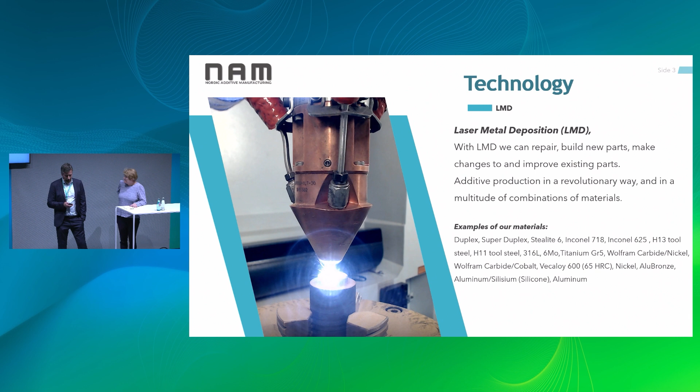We are using Siemens NX for both CAD and CAM, which gives us the possibility to produce advanced geometry. We have had a tight collaboration with the Norwegian supplier of the software to be able to do this.

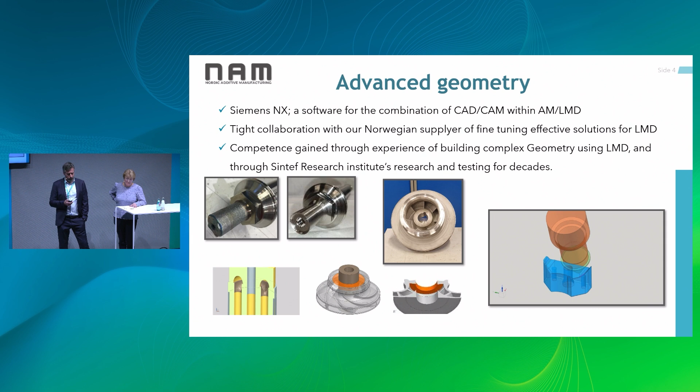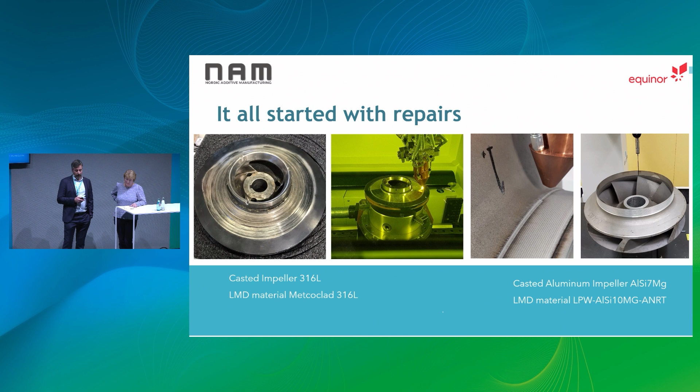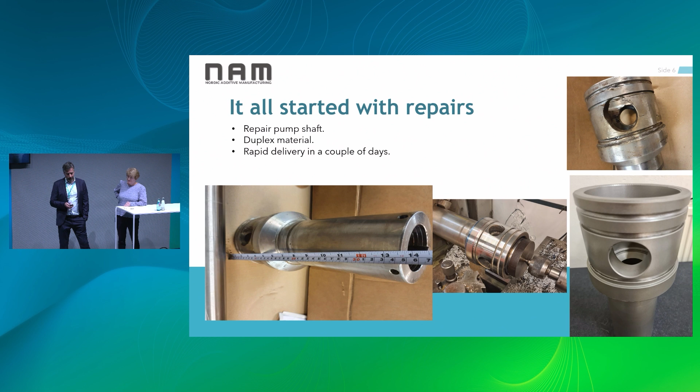But it all started with repairs, for us it started with repairs. You see some impellers here for Equinor, both in 316 steel and also in aluminium, and some examples with shafts for pumps where we have done repair. This is in duplex material, 22 chrome. And also repairs like this in aluminium bronze for this old steam dumper, a steamboat going on our local lake.

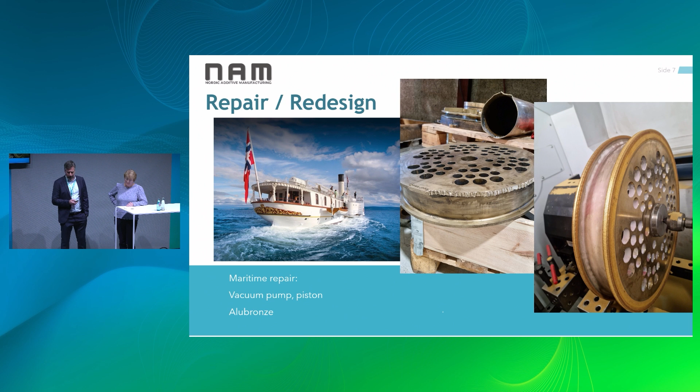And now Mette will talk us through a couple of projects. Together with NAM, we made two quite good components, I think, and we also tried to follow the guidelines from DNV.

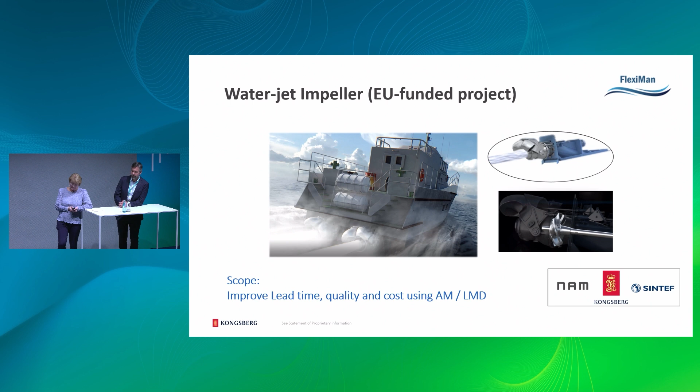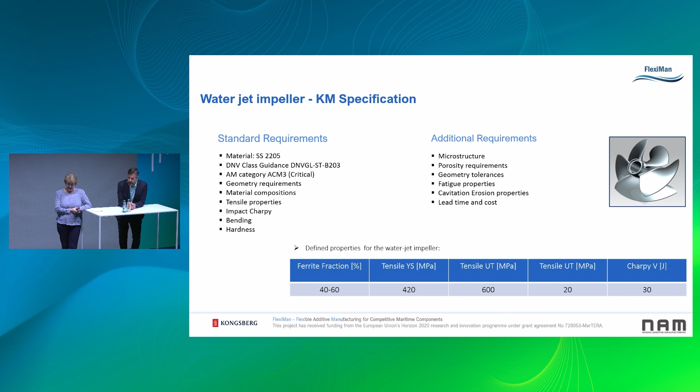We had an EU project, we call it Fleximan, and we chose to make a water jet impeller in duplex material with this LMD method. The scope was to improve lead time, improve quality, and reduce cost. There are standard requirements for this material, but in addition we also had Kongsberg Maritime requirements regarding microstructure, porosity, fatigue which is important for a water jet impeller, cavitation erosion, and also lead time and cost.

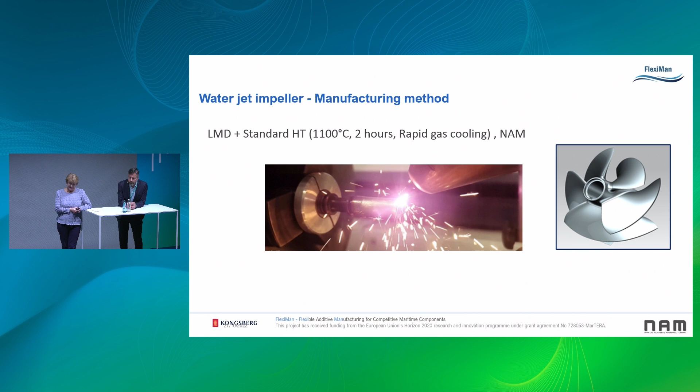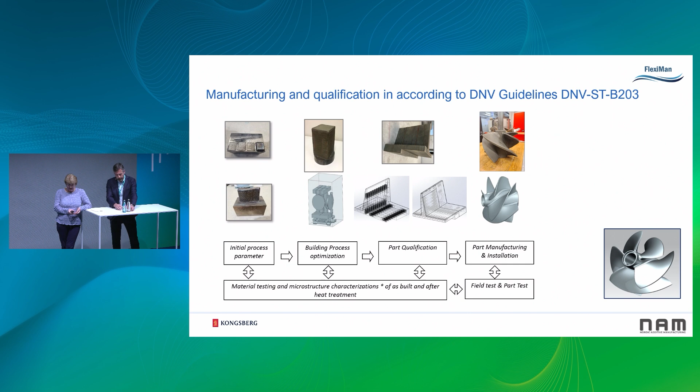So this impeller was produced by NAM and also heat treated. We followed the guidelines from DNV. This is a critical part, so we had to use the AMC3 rules. We had to make this block, and in addition a representative part as in the critical part of the impeller blades. We did a lot of testing, and the results were very good. All properties were better than the requirements for this part, in all directions.

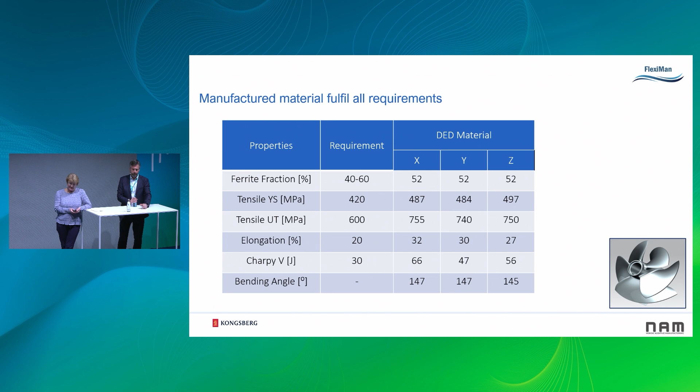One very good piece of news was the cavitation erosion testing. Because this impeller is highly loaded and a very high speed propeller, we have some problems with erosion in this cast duplex material. When we compared cast duplex with bronze and also this printed material, it seems like the LMD material has better erosion properties than the cast one, which is very good for our impellers. Also for fatigue testing, our stresses are below the fatigue limit, so even at high cycles the properties are as good as cast.

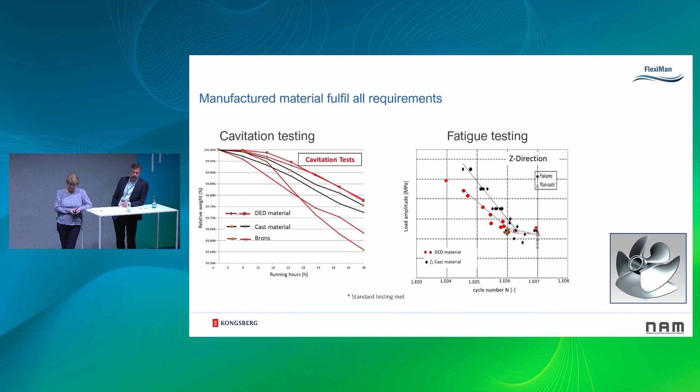So here you see the result of the printed impeller, the machined impeller, and also the geometry of this impeller was very good. In production in Finland, they said maybe they should have given tighter tolerances, because they were skeptical about the low tolerances they could give. Now they know that next time they can decrease the machining allowance on the next water jet impeller. Also, there was some small porosity, but still within the requirements from the class society.

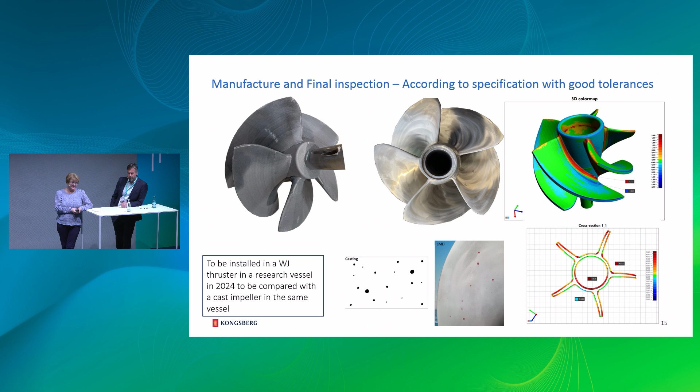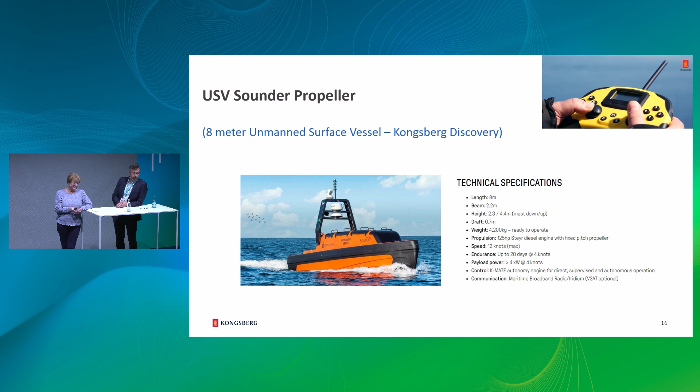The next part is, at Kongsberg Discovery, we have this unmanned surface vessel which does a lot of research in the oceans. It's filled up with a lot of equipment, sensors, and so on. They have only bought a standard propulsion system for this vessel, and since it's autonomous, it has to last as long as possible. So whether they use diesel or electric energy, they want it to run for as long a time as possible, and this propulsion system was not optimal.

So we did a design optimization of this propulsion system, did CFD analysis and strength calculations, and we made this propulsion system now in glass fiber, with a 3D printed propeller using LMD.

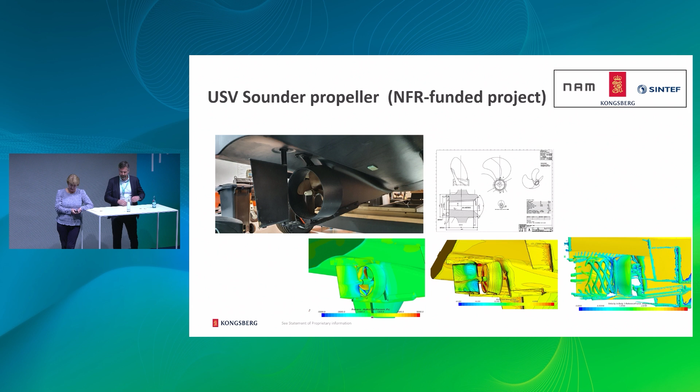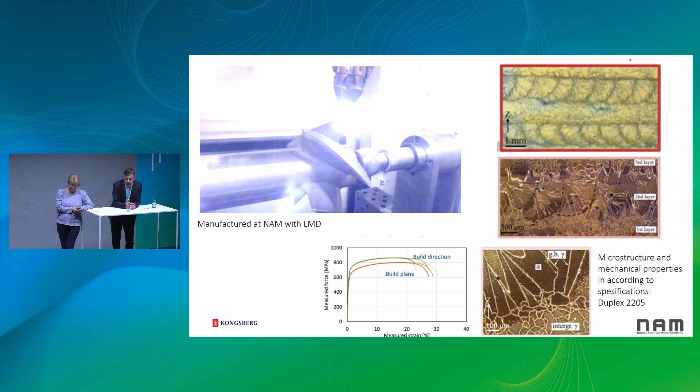Yeah, so here you see it went very well. The microstructure is quite nice, and the mechanical properties are according to our requirements.

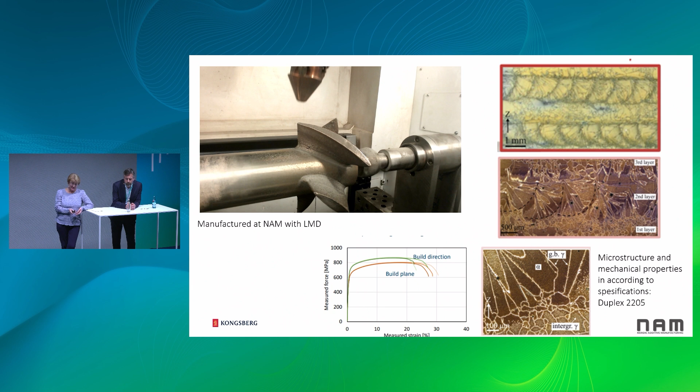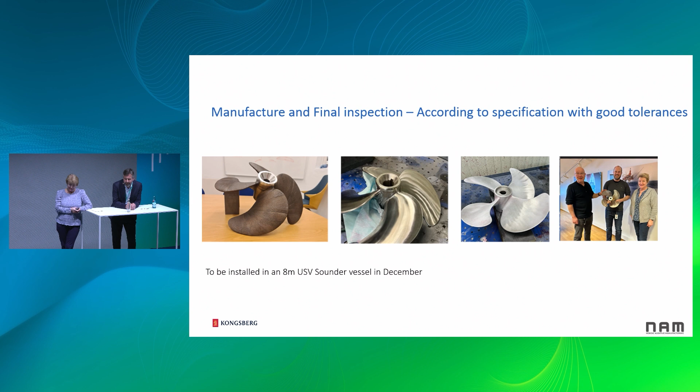We are ahead of schedule, Mette. Okay, it goes fast. Yes.

The next project is one we have been doing together with Eureka. Eureka is the OEM for these products, and Equinor is the customer. It's all about energy optimizing of a big seawater lift pump, using additive manufacturing, laser metal deposition.

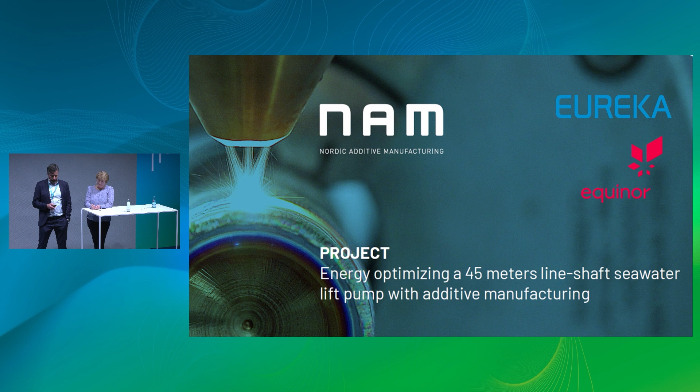The scope of work was like this: this pump pumped 1,000 cubic meters too much every hour. It wasn't so important when producing the power out on the field, but as you might know, regarding electrical power out on the fields, it will become more and more important to do this kind of effectivization. You see a little bit about the CO2 energy reduction at the bottom of the screen.

This is quite a big product. The pump structure is 45 meters long. And you see the platform it's used on.

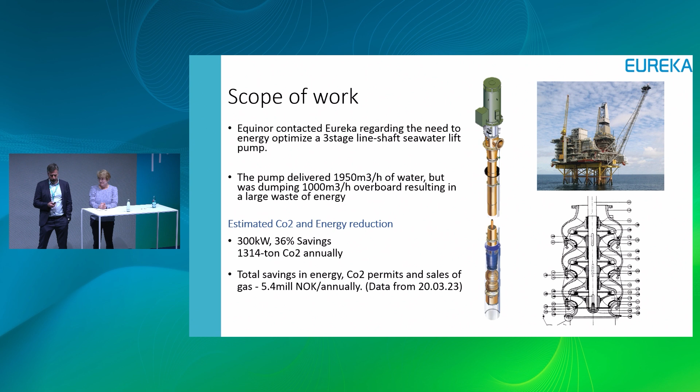There were some expected challenges in this project. The size of the impeller was 120 kilos per impeller, and there were 3 impellers. It's a very complex material, 22 chrome duplex, and it also involved NORSOK qualification. NORSOK is a standard for the Norwegian shelf, out on the Norwegian shelf. It was also qualified according to the new DNV GL standard B203, AMC2.

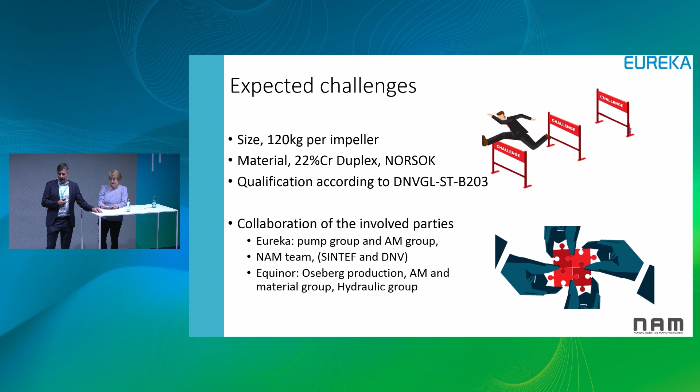What I think is important for a project like this is the collaboration of the involved parties: the collaboration with the OEM, Eureka, and our team at NAM, but also with SINTEF, the research institute, with their laboratory and test facilities, and also DNV, with this new standard being developed alongside the project, and Equinor as the end user of the product.

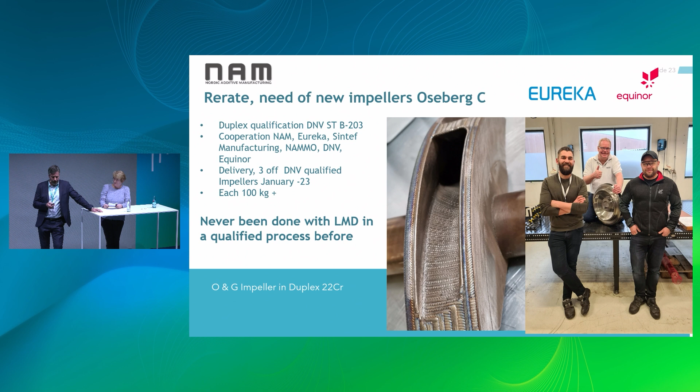It went well. We managed to produce these impellers in a qualified process, and we completed the qualification according to the standard. But it wasn't without a fight and some struggle - we spent a lot more time than scheduled, and a lot of effort to do this. But in February this year, at the end of January, we delivered 3 DNV qualified impellers, each 100 kilos machined. This has never been done as a qualified LMD process before.

This complex geometry is one thing, but the complex material is another thing. It's an austenitic ferritic material, and it's very important with the heat treatment, the building parameters, the speed, the power of the laser, and so on. We had different attempts in the strategy on building the impeller, but we succeeded in the end.

Siemens NX was an important enabler for doing this complex geometry. And again, I mentioned this tight cooperation. Here is our machine, which we used for this product. It's a Trumpf TruLaser Cell 3000.

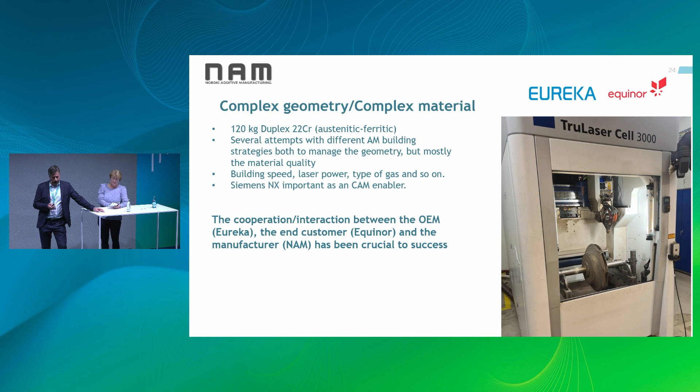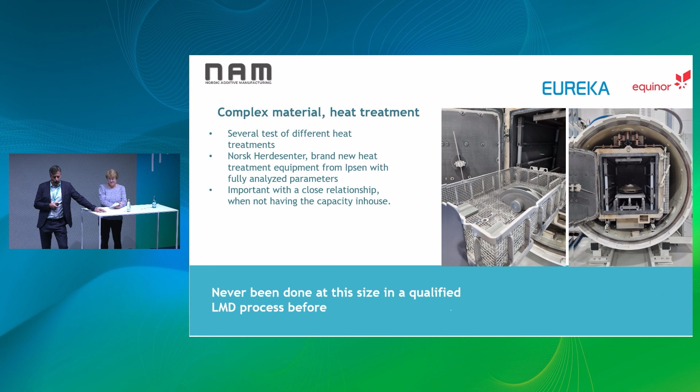This is from the heat treatment. We don't have our own heat treatment on this scale, so it's a company close by that did the heat treatment. They have new equipment from Ipsen in Germany, very good equipment for this kind of heat treatment.

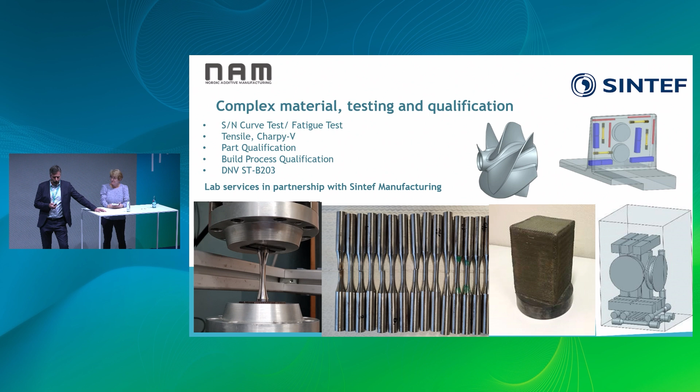As Mette showed us with the propellers, the test and verification for qualification was very, very important. With these fatigue tests, the tensile, the Charpy, we have to test at minus 46 degrees centigrade with this Charpy V, and it's very strict and tight tolerances for the materials. But during the project, we qualified the process, qualified the parts, the part family. So now we are ready to make more products like this.

Very, very interesting, being here together with Equinor and looking at the tests, and the tests were better than planned, so that was very good. It was slightly lower vibrations, they had slightly lower power consumption than calculated. So the AM-built impellers was a success. Lucky for us.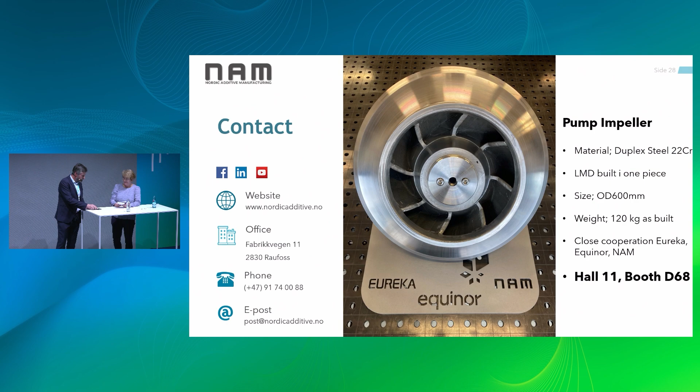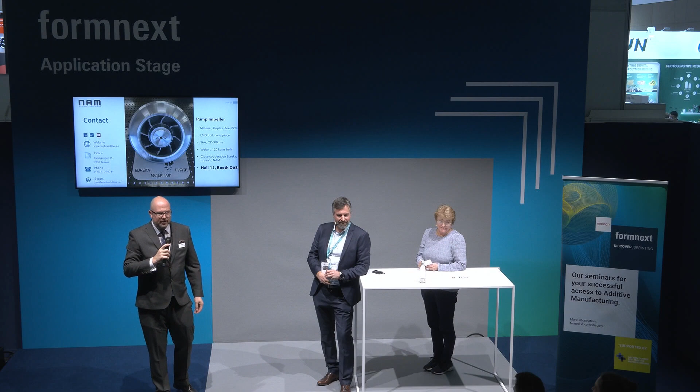Thank you very much, both. Any questions? Any questions to end the day? I know it's late, you've all been an excellent audience. Thank you very much for the presentation.

For this part, I would like to ask, is there any internal CNC machining? No, not any internal CNC machining. Earlier, I have made a lot of foundry patterns for a product like this, so the other technology they use is castings. We have been using some acid washing and just some mechanical grinding, but almost nothing inside.

Jone, Eureka, the OEM, is over here. So no machining inside, is it the same for casted parts? Yes, okay, it will be. But they can coat the cores and they can do something with the sand cores before they put them in the mold. Thanks a lot.

Thank you very much also from my side for the presentation. I would ask, if possible, could you indicate by using that new technology, a combination of new technologies to produce these impellers, what is the cost reduction compared to a conventional production method?

This impeller will be more expensive than a casted impeller. But if you send me an order for a foundry pattern, I will have 10 weeks before I deliver a pattern to you. In Norway, we don't have any NORSOK qualified foundries, so we send the patterns to Italy or Portugal, and even Equinor is a small customer when it comes to castings. So it can take 6-8 months before they get these casted parts, and then it goes to machining and so on. You always have the risk of pores, or some faults with the castings, and then you get this all over again.

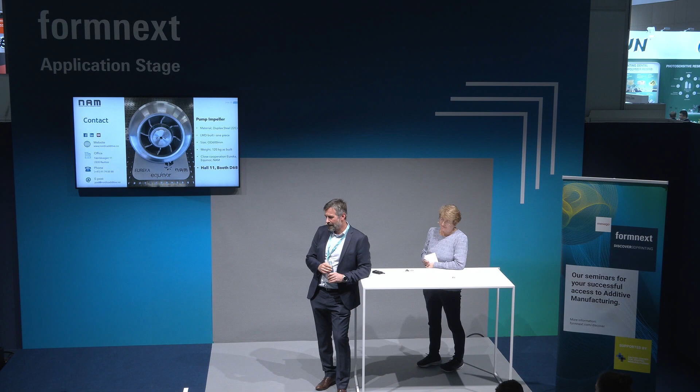Thank you. Okay, any further questions? No? Thank you both very much. Thank you.